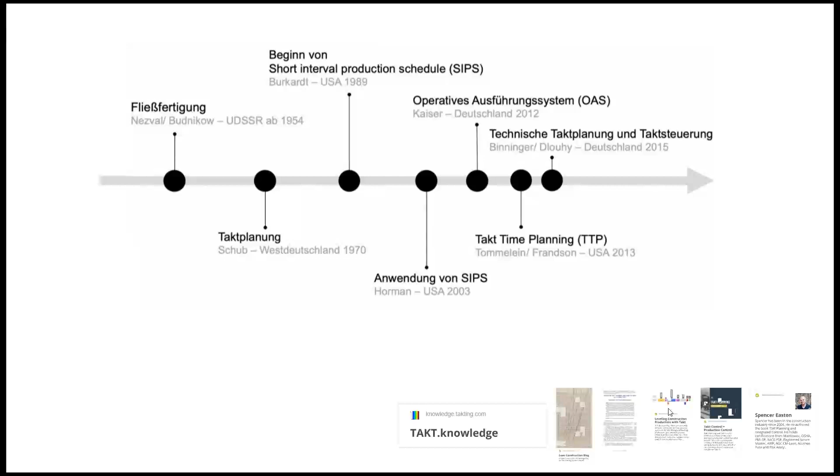So from here, the origin obviously predates CPM, like I talked about, but the principles and the system in which it's founded come from lean principles. It comes from lean manufacturing. It has its roots in the Toyota production system. It has, obviously, takt time. That's one of the major tenets. But the concept of one-piece flow and takt time combined with pull is the sweet spot of takt planning. So the principles of takt planning are those three, which happen to be the lean principles.

I'll show a subsequent slide of the lean principles, and the person that we learned it from, Chihiro Nakao, who was the second in command at Toyota when Taiichi Ohno was creating the Toyota production system. So some really great grassroots translation that we've gotten from Mr. Nakao.

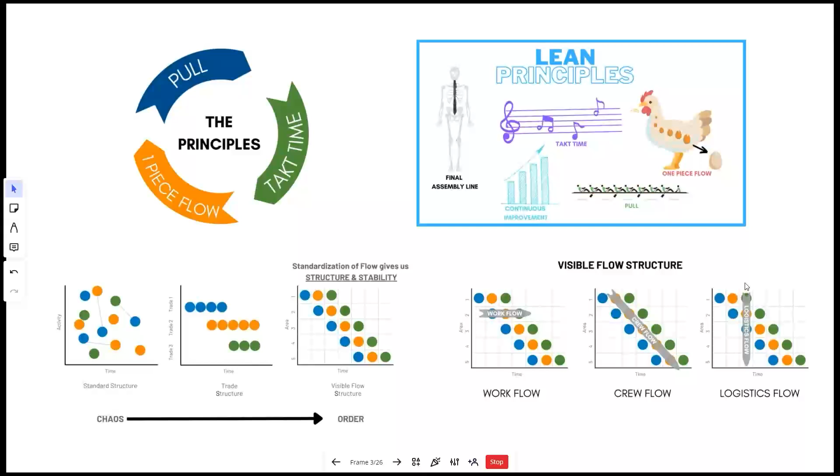And then you would have the logistics flow or path of construction, meaning you would do this area first, this area second, so on and so forth, and that would be the order in which you would do that work. So that's the view and focuses that you see from a takt plan.

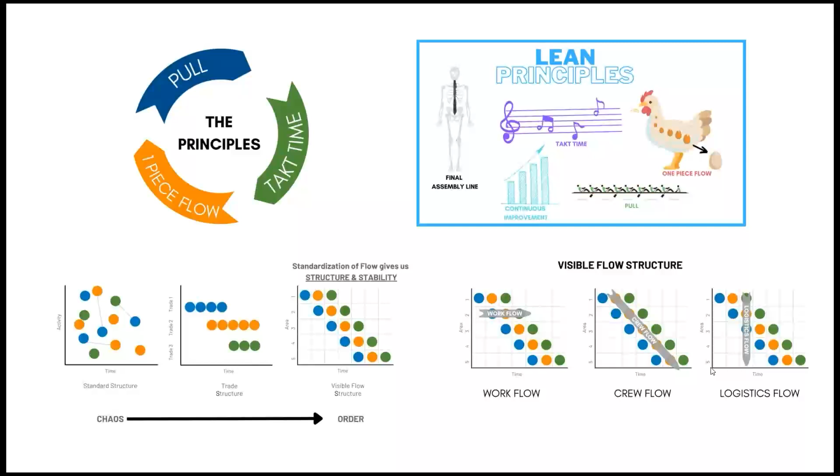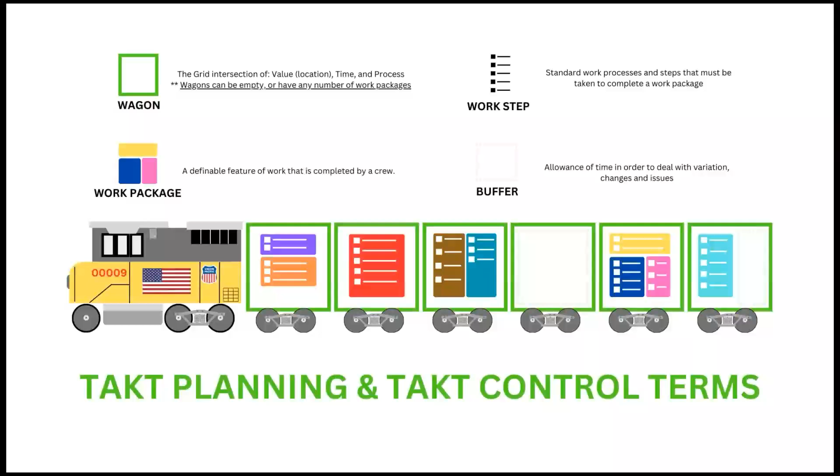So these are some of those general terms. I have a little bit more in-depth slide that shows you some examples. Like I talked about, the train is kind of that sequence. The engine is what's setting the takt time buffer you can see in there. And if we were to zoom in on a takt plan, we could see that sequence of work. You can see the wagons, you can see the work packages.

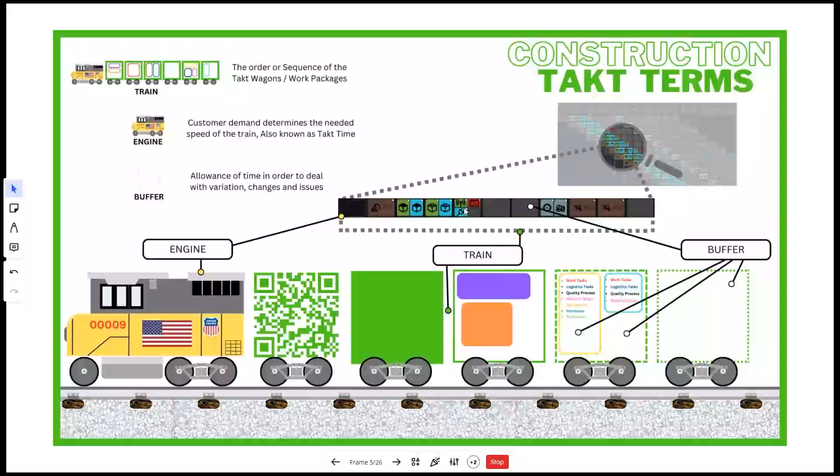And if we were to explode one of these work packages, and I go to the next slide, you can actually see, if you were to click on one of them, the integral steps within, whether that's work steps, logistic steps, quality, material, so on and so forth. So the work package really does become that nucleus of information, kind of like what we see in advanced work packaging.

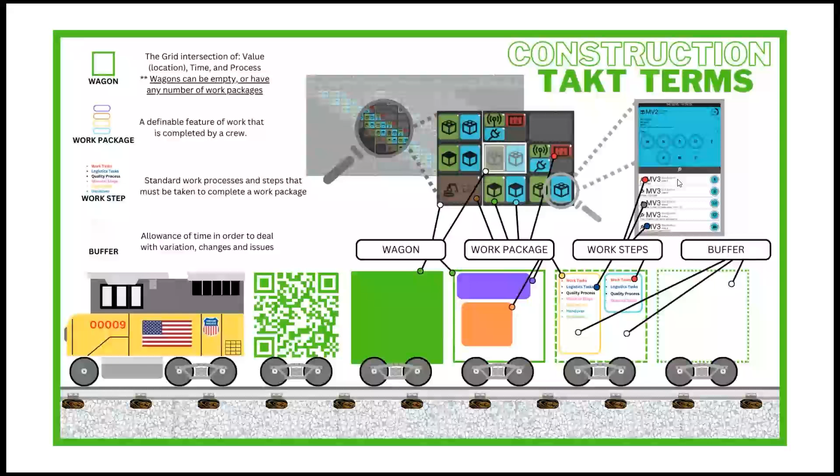So all of this culminates in one overarching production schedule, which could be for a project, it could be for a phase of work, it could be for a certain portion of a phase of work. So it could be done at any level, and it creates the backbone or structure for our production. Hence why takt planning really is synonymous with production planning.

It's trying to understand what pace we need to all hit in order to hit the overall production, and coming up with what are the work areas or zones that we need to be working in, what are the tasks and the sequence thereof, and all of the subsequent things.

aligned with production. So if it's not hitting at the pace or giving all of these bits of information to that individual either wagon or work package, then we're not going to be successful, which is why I think that's the other thing that really aligns work packaging with takt planning and takt control.

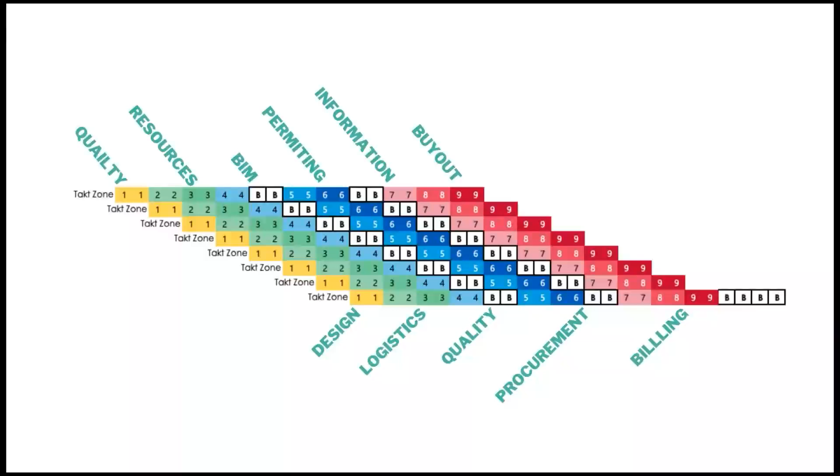So I have a couple real life examples that I want to kind of showcase. First, I'm going to start off with a little video. We're going to see if my audio comes through. If not, I'll talk through the example of the quick video, and then I have a bunch of other case studies that I'll quickly go through so you can see examples of what it looks like in some different types of construction projects and industries. So we'll go from there and see if this works.

So I'll need some feedback to see if we're hearing the sound and audio from this right here. I'm not hearing any audio. Nothing? Okay, let me check one thing really quick. I'm unable to share it. Well, I'll just talk through it. Show, share, audience view. I might just hit play and go through this. I'm not seeing a way how to do it. So we'll just go ahead and continue, hit play.

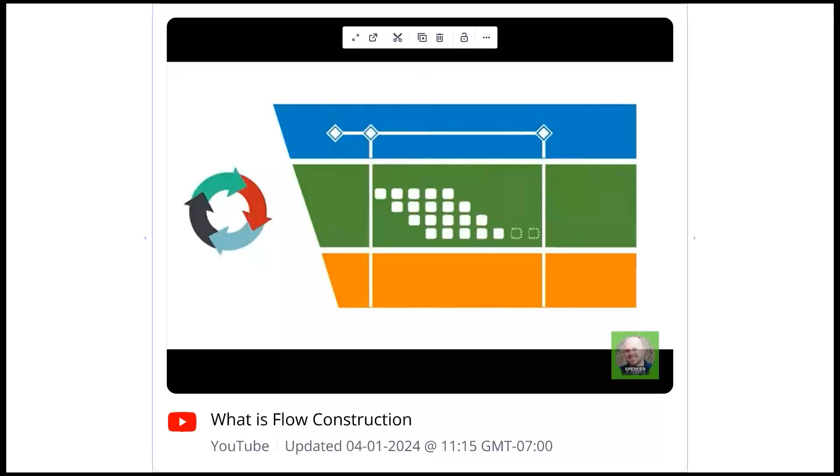So this is an example. This is a quick little 2-minute video that we share with folks inside and outside of the company that I currently work for, to try to help them understand what takt planning and takt control is. At Mortenson, we call takt planning and takt control flow construction. And so you see the icon here, we break it down into the parts, which is the system to help us plan, schedule, and execute work. It helps us understand that pace that I talked about originally, and what it takes to hit that pace.

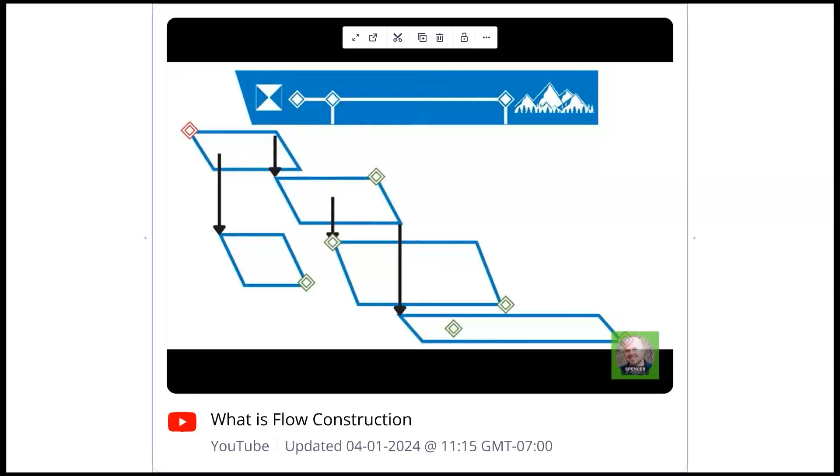And so at the high level, early on, before we have trade partners onboarded, we try to figure out how many phases of work there are and how the flow of that work is going to go. Is it one major phase, and how do we have all trades working together? Or is it multiple phases to get to the overall duration that will give us the best flow of work?

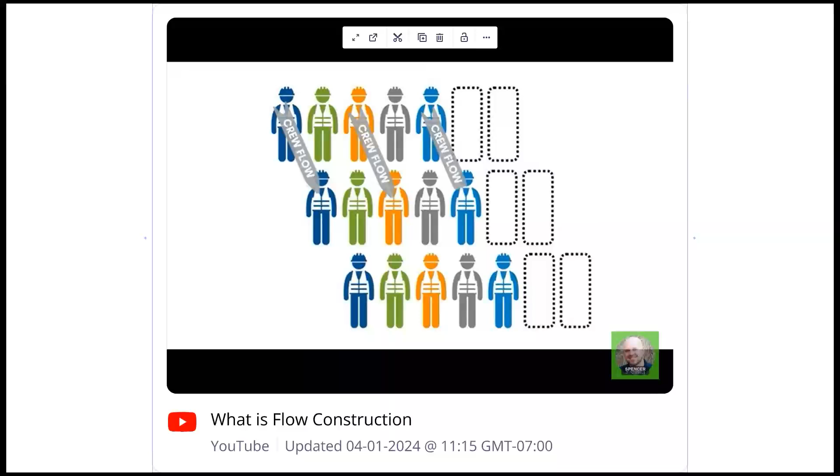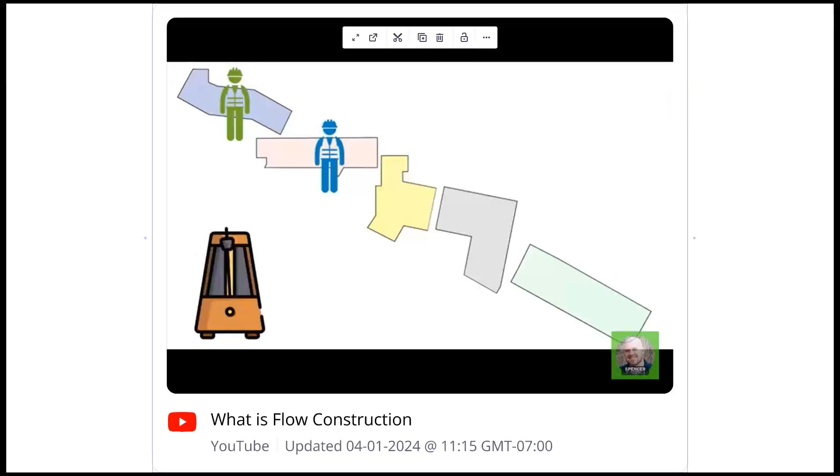We also talk about at Mortenson how we build that workflow with trades. So if we have that early on strategic plan, how do we onboard trades to get the best workflow and crew flow? So when we start, we usually break down the scopes of work into zones that we'll be able to build the project in, and then get everyone aligned to a common pace so that everyone is able to flow at the same pace.

And there's lots of different ways to pull those knobs, but the best way is to plan at the next level of detail. So this next level of detail is that kind of sub-step level where we're going into, if the work package has a lot of different data and information in it, what work steps do we have? How many people, logistics, material, equipment, information do we need for each work package so that we can understand if the activity is going to go and if it's going to be successful. Hence why we'll need to be focused on removing roadblocks ahead to make sure that all of those things are answered, that we can actually do that work when it comes up.

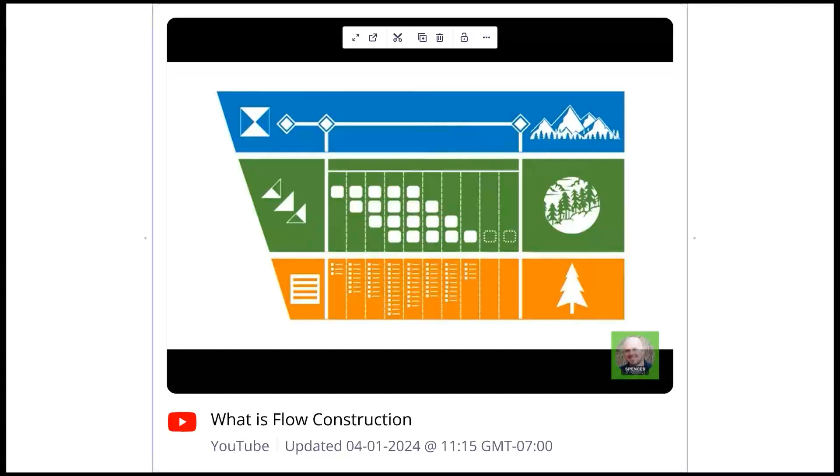So this is an example of us trying to communicate to our trade partners, to our owners, and internally to teams that haven't used it yet, how we as Mortenson are redefining what is possible, which is the utilization of takt planning and takt control. So here's an example of a tool where you can see the flow of work, the flow of trades, or the crew flow, and the logistics flow. So you can see the idea behind having a work package that is repeated over and over within a certain space, within a certain area. You see how that's kind of shown right here.

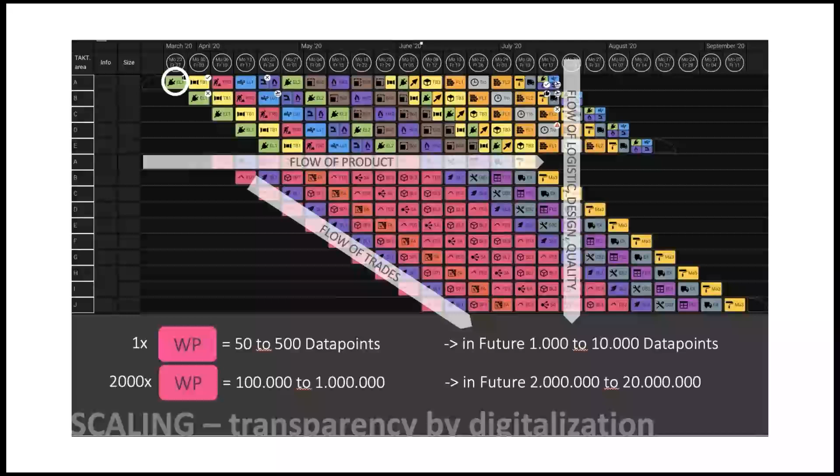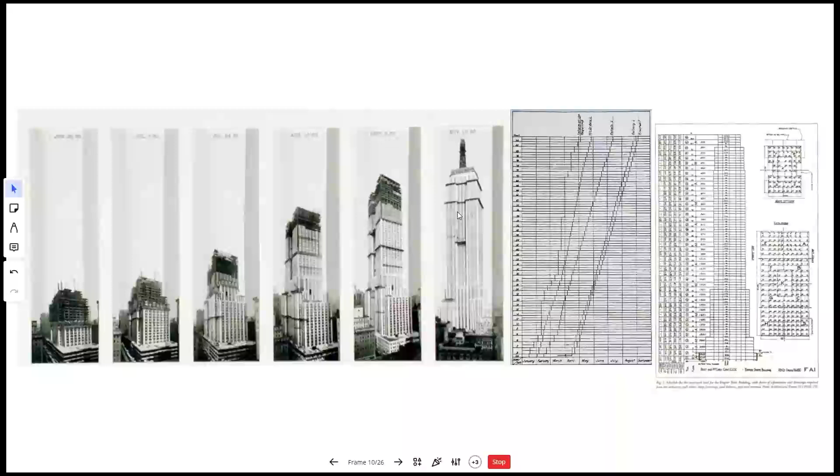You can see the workspaces or the zones or construction work areas in which they broke down not only the levels, but each floor down into subsequent areas, which this is all hand-drawn, by the way. And then you can see photographs of how that flowed within, I think this is a week or two week snapshot between each one of these. The crazy thing is I believe it was 13 months, or someone maybe can correct me on that. It was completed from nothing to complete space, meaning people can occupy those areas, drywall and everything, within 13 months, which is something we can't touch today. And it's crazy that we went from this mentality and we went a different path. So here's a great example of using the same concepts to achieve an amazing flow of work.

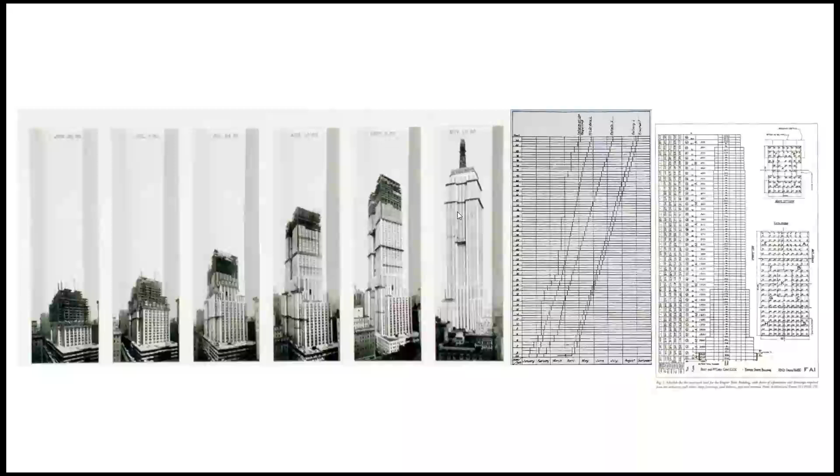The next example that I have is by Hensel Phelps. So this was their Pentagon renovation project. They call it a SIP schedule, but it's the same concepts of breaking down the work zones, understanding the sequence of tasks, getting to a common pace, and then flowing that work from one place to the next in those three major flows. So great example here of this project.

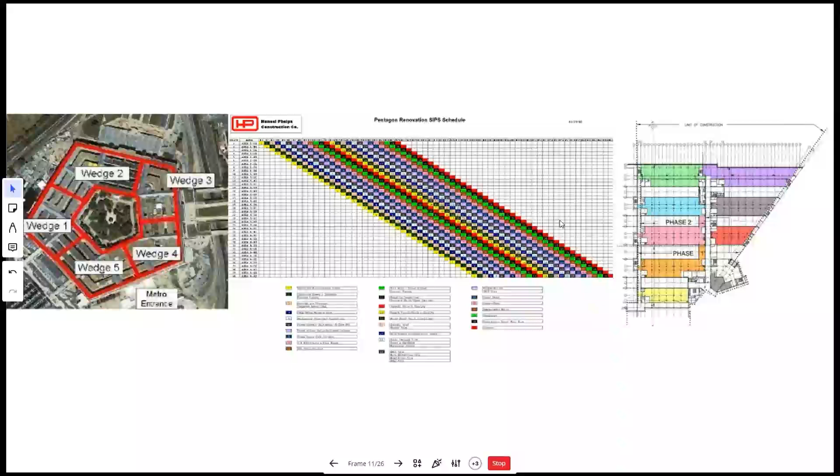Now this next one is one that I personally was involved with. And this was an $80 million hospital project, a couple different buildings that were stitched together, different types of work. And this particular team was using the traditional method and decided to switch to a takt plan to recover a project that was 12 weeks behind. And not only did we recuperate those 12 weeks, but we finished a week ahead of schedule. For those of you that will be able to have this link, there's a little testimonial from this team, a great little example that you can click on and see the actual example here and have them walk through.

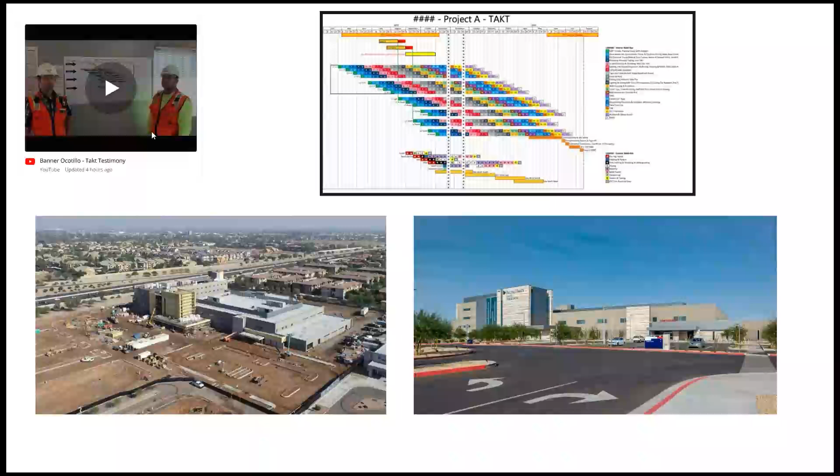A great thing that they did is they had little cards for every single worker on site that had this takt plan, and everyone had it in their pocket, and they made it a fun ordeal for everybody, kind of testing them. Hey, where should the electricians be next week? And the first person to come up with the answer got a prize, stuff like that. Really, you know, making it fun. So that's an example. We have another hospital example.

This one was actually on a Native American reservation, and again, I have a couple other videos here subsequent down here that you'll be able to look through and watch and see how this team used the Takt Plan. They used it in conjunction with the Last Planner System, which was really great, and understanding their flow of materials was another big thing. So they really had a great time diving into the first example that this company had with the idea of work packages.

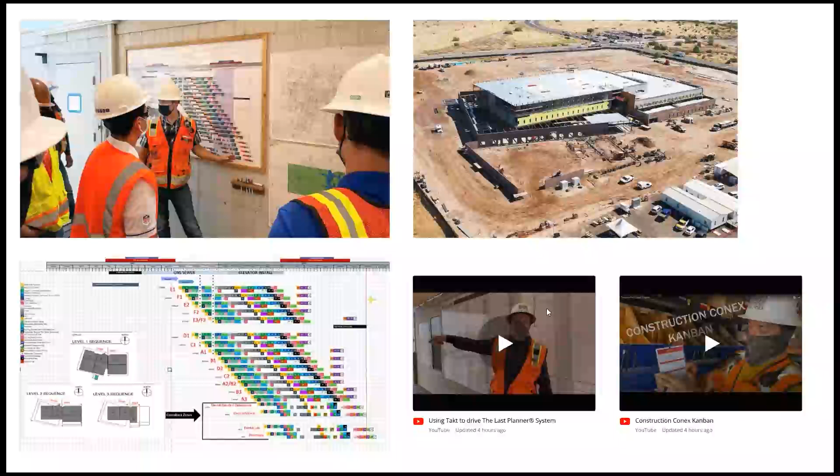So not just a task that just needed to happen, but understanding all the underlying data that would need to be housed in that task. So really, really fun, great example on that one. And then I have a screen that will kind of be overwhelming. This was all I wanted to fit on a screen.

I've successfully helped over 300 projects implement Takt planning, from a lot of different industries, from a lot of different types of construction work, everything manufacturing, done a little bit of oil and gas, done some energy and infrastructure jobs, done sports and entertainment jobs, done office building jobs, done assisted living jobs, done a little bit of everything. So you can see here that it might not look exactly the same, but you see the concepts that I've been referring to and how it's applied in different examples across different industries.

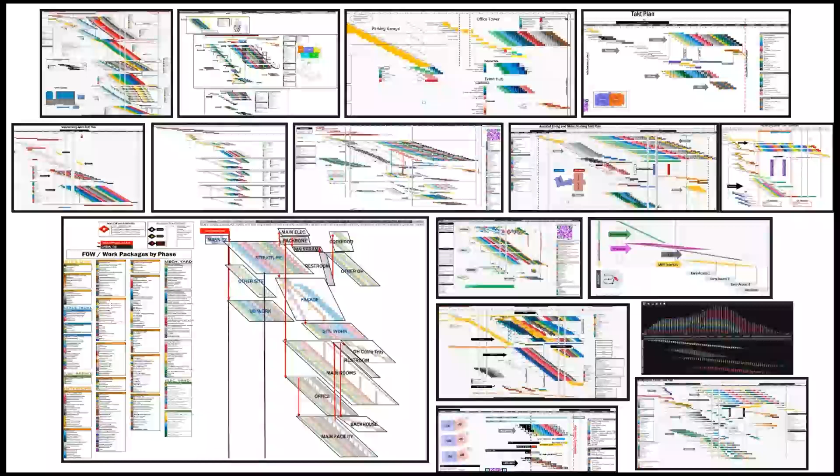So now that we have a base understanding of the idea behind Takt planning and Takt control, I wanted to dive into the center structure for what Takt planning is, which is the connection point between work packaging and Takt planning, which is the work package. So the work package is kind of like the nucleus for Takt planning. It's the scalable, repeatable thing that will happen from area to area to area, or zone to zone to zone.

And that's the idea. We're trying to find the similarities. What is the same that we can flow from space to space to space? And how do we standardize as much as possible? A lot of times we only see the differences. We only see the things that stand out to us, which are the differences. And sometimes we take for granted the things that are standard.

And a lot of times the standards can get us a majority of the way there, or if not, take a big chunk of the workload off of us, which is why understanding the implementation of work packages within construction, really, I see it both from the advanced work packaging side and the Takt planning and Takt control side, helping us to get to a more streamlined, optimized flow of work and understanding how to execute better, with those standards, the central being the work package.

You can see there's a bunch of different ways to think about this. So I have 4 different categories here, whether it's the content of the work package, and this is where you see the combination of engineering work packages, you see design steps, that's the same type of concept. So the work package itself isn't necessarily each individual type of work package like we see in advanced work packaging. It's an overarching work package that houses all of those individual work packages or information and content that would need to be created, curated, or coordinated for the work package.

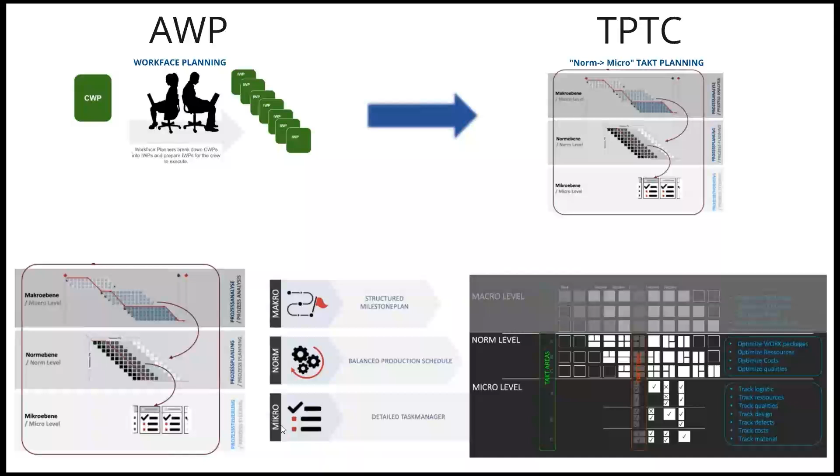We also have another example of some good cross processes from path of construction and construction work areas. So that's how it's talked about in advanced work packaging. Obviously, we have similar things with what we call logistical flow. That is the path of construction. So you're moving from this space across here, up this direction, or you're doing this and then that, right? And those places in which you're doing the work are the construction work areas, i.e. the takt zones. People call those different things, areas or zones, but the idea is still the same. So when I learned this from the AWP side, I was super excited to see that we're all going down the same path of defining the space and scope of work down to that really great level.

I have a GIF video here. It's not playing. But here's an example of a takt. Oh, there you go. So you see down here in this bottom right corner, as you click onto the different work packages, you're seeing the integrated BIM model into this system, which is called takting.

And you can click on each individual work package and it's showing you the parts and pieces that you have connected in your actual model. So as you click through it, you can see not only the construction work area that you're working in, but the actual IWP that is connected to those individual work packages. So a really great system to help you visualize some of those same things that we talk about between both systems.

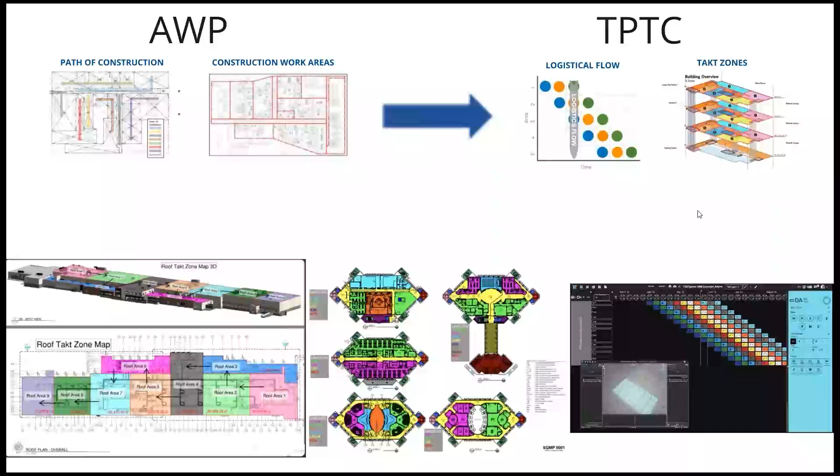So hopefully you can see that comparison and how they support and contrast each other between the two systems. We also hear a lot about the upfront procurement work package, bill of materials, all of those types of ideas in advanced work packaging. Here's another example from that same system, takting, where we have all of the different bill of materials that are coordinated over the next 3 takt times, and you can see them broken out by takt time and what should be showing up.

Here's that same exact example, and I filtered so you can see how many bill of materials are coordinated and planned, and you can see them up here. This is the number of them, and then you can click into the material step and say, okay, if I want to see those materials, what elements are those linked to? So it's going down to that really next level data collection, data automation for us out on construction projects. So another great way to make that connection point between what we're doing with material procurement and what we're doing with execution, and how that works similarly between takt planning and takt control and advanced work packaging.

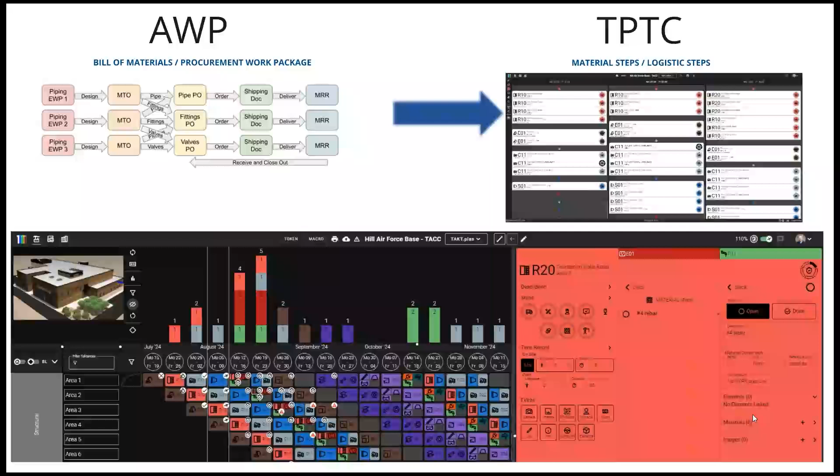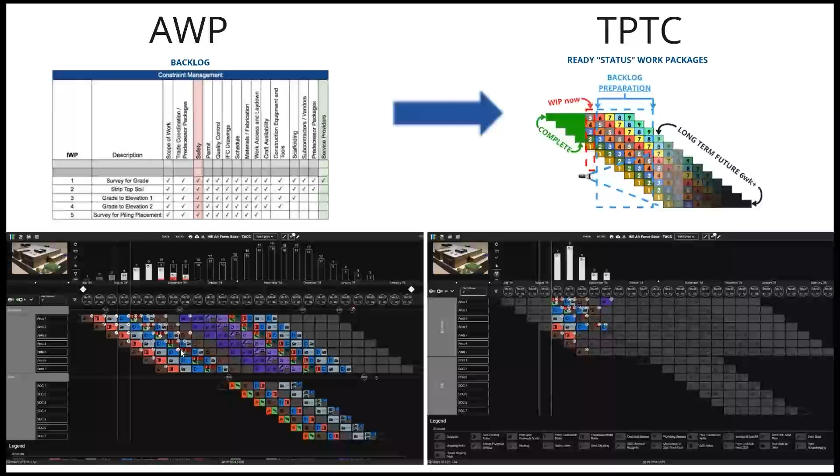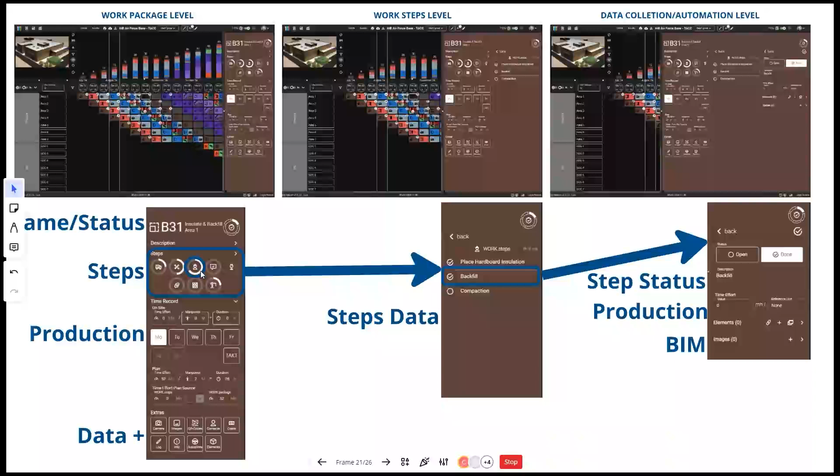And if you were to select that even further, it takes you one step further down the next level of data integration, which is the BIM model elements for each one of those steps, production by each one of those, and status by each. So you can see how much status you have by each individual work package. So you're tracking that across every single work package for the entire production schedule.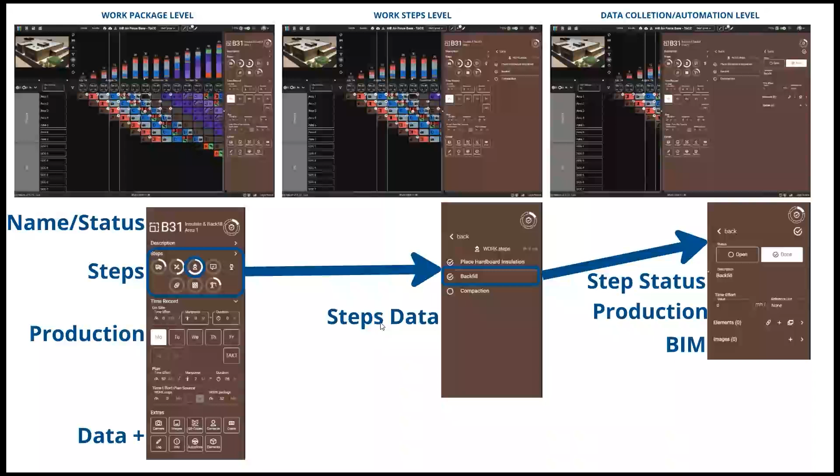So this is kind of showing, advanced work packaging is kind of the next level of data integration of all these different entities into one kind of common language, the work package. It's the same type of entity here, where you see that next level of data, not only collection, but utilization of planning, preparation, production, and adherence to our plan, and mitigation of any risks.

So one final thing I wanted to talk about with regards to Takt planning: really in my brain, when I hear Takt plan, I hear work package visual. So here's a more zoomed in visual of that same system, but this is that idea that I started with, where you can see the wagons or Takt time by area, so the pace that we need to hit for each area within the process. And you can see each individual work package and the status thereof. So it's a really great visualization of those work packages in a production schedule or production plan type visual.

And so even though you might not know the names of these or what type of work it is, you basically get the gist by looking at it: the sequence of work, the flow of the trades, and the order in which it will go. If you could see the areas, which I didn't include here on the side, you can basically pick up the gist very, very quick.

I've had a lot of trade partners, internal team members, owners, and stakeholders that we show this to originally, and for the first like 5 seconds, they're like, oh my gosh, this looks like a lot. And once you spend about 60 seconds to help describe what the chart actually means, everybody that I've ever come into communication with understands it really, really quickly.

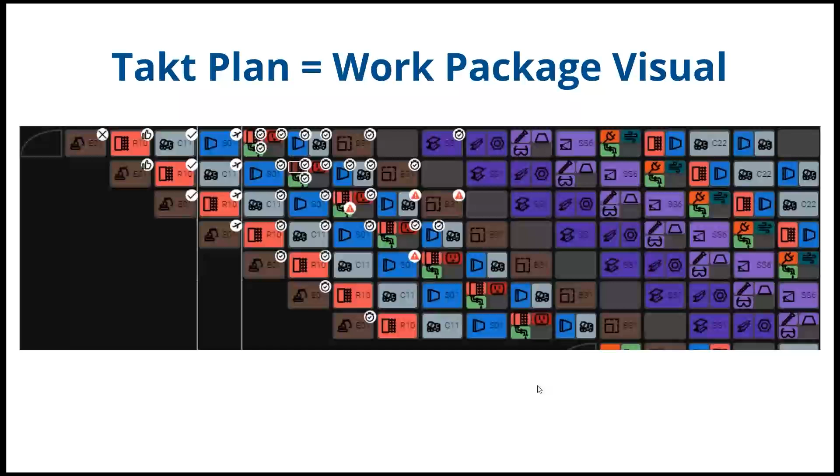So I'm gonna pivot off of the ideas behind Takt and the connections between advanced work packaging and takt planning, and pivot to next steps. Obviously, there's probably a number of folks on the call that are looking for, okay, this is great. I see a lot of things that I might want to use or at least take part of. How do we do that? Or maybe full-fledged test the system out for your projects. I suggest 3 major things for anyone that is wanting to and willing to try takt planning and takt control, and I'll dive into each one individually.

So learn the principles and system, one step at a time, and Kaizen. Let's go one at a time. So learn the principles and systems. There's lots of places that you can learn about takt planning and takt control. There's 3 main ones that I would recommend personally.